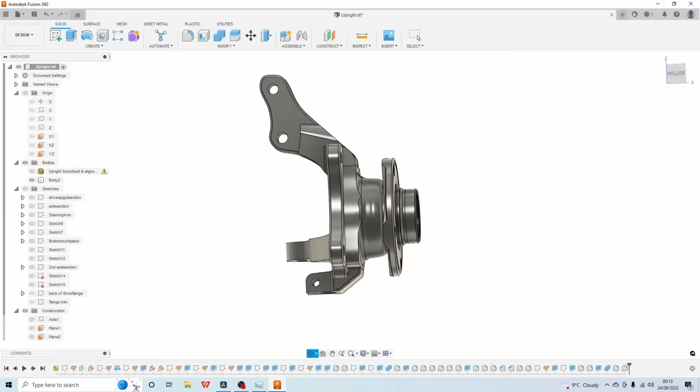If you want to use a 3D scan of a part like this to make a fully modifiable and usable 3D CAD model using only free software, you're in the right place.

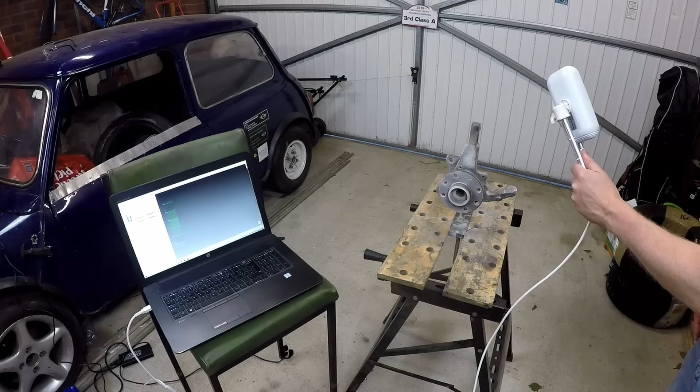So the first job, of course, is to scan the part. So I'm using my CR Scan Lizard to scan this, a Vauxhall Corsa C upright. Now the reason I'm scanning this will become obvious in later videos, but for now all we need to know is that I need a 3D model of this that I can easily modify. But it's also a useful part because it's got some very clear geometry, it's got planes, it's also got cast faces. That means that I've got a nice variation of geometry to deal with.

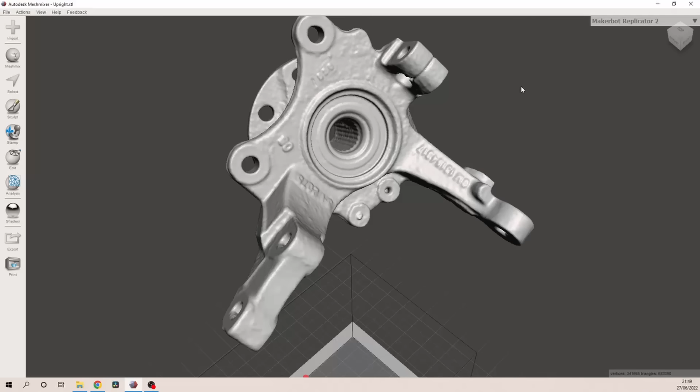Now, it doesn't matter which scanner you're using because actually we're just going to pick up from the STL. So for this, I'll simply say I used dry shampoo and scanned it from multiple angles, combined them to give me this, the final STL. Which leaves us with this 3D model.

Before we go any further, we just need to work out what we're trying to achieve here. If we just wanted something we could 3D print or something that was just purely a copy of what we've got as far as our scanner can do, well, there it is. We've got it, done. Send it to the printer, it's an STL, you can do it straight away. However, that's not what we want to do. So we want to reverse engineer it.

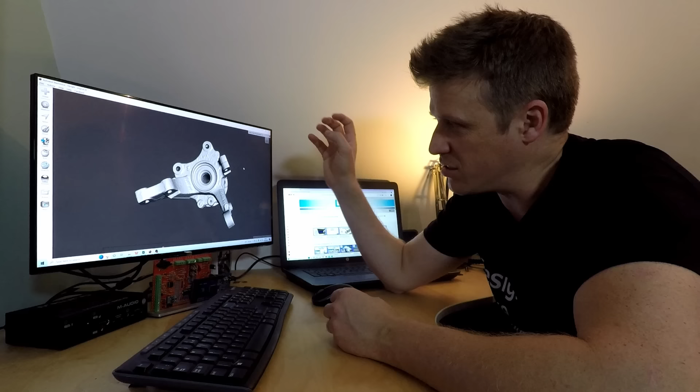So we want to pull out all of the features that interact with other items that give it its form, its function and its fit. So I want to extract all of these points where it interacts, so the steering arm, the strut, the brake caliper, the drive shaft, and extract all that information and put it into another 3D model that I can then modify and change using parameters. So that's what we're going to do.

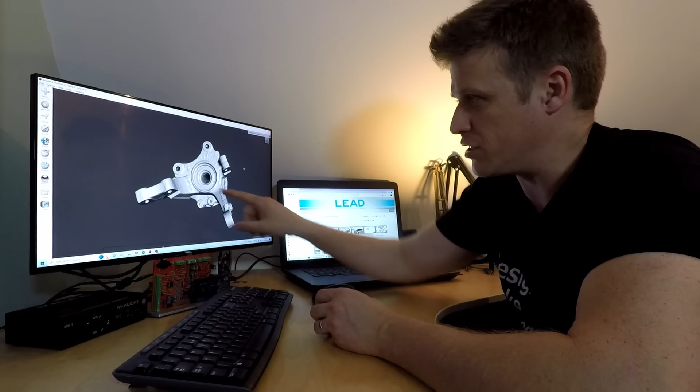But first off, we're going to remove a few things from this model and simplify it slightly. So we've got all this writing here, all these casting marks, we've got these items here that look like they're a sprue from where it's been cast, which we don't need. So we're going to tidy this up, we're going to do it all in Meshmixer. So, hit the music.

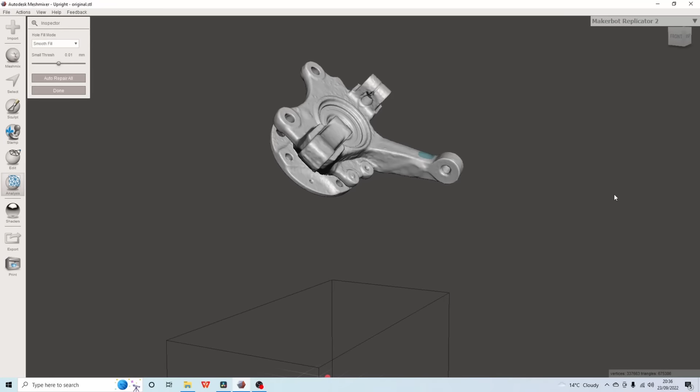And there you have it, a simplified, smoothed out model that really is just giving us the information that we really want to see. But as you can tell, it's not aligned with the coordinate system at the moment, which is a problem. So for that, we're going to open up another piece of software. So this is GOM Inspect, and this is a fairly chunky piece of software that generally only the pros get to play with, but they do have a free version. So you can open a new project, import your STL.

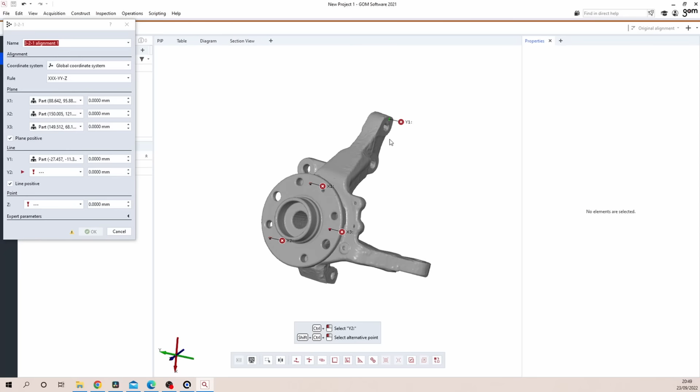Now we've got the model in the software, we can easily align it to our coordinate system by using a 3-2-1 alignment, where we pick, first off, 3 points that are on a plane perpendicular to the x-axis, and then 2 points that are on a plane perpendicular to the y-axis, and then 1 point on a plane perpendicular to the z-axis. And there we have it, we've got all of our points in, and you can see it's now aligned to our coordinate system.

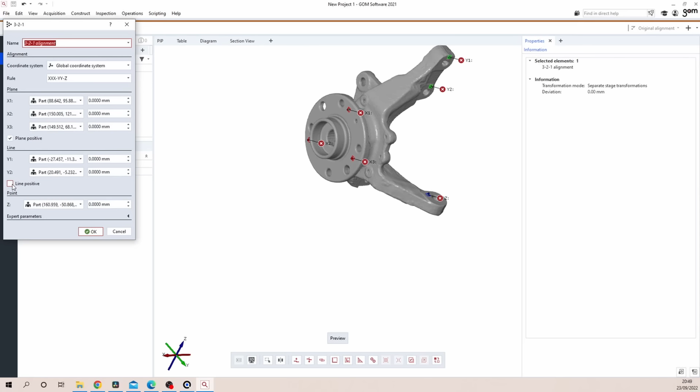But you can see Z's going the wrong way, Z's going down instead of up. So if we flip that, that will flip Z for us going up that way. So we simply go OK, and there you have it. It's now aligned to our coordinate system.

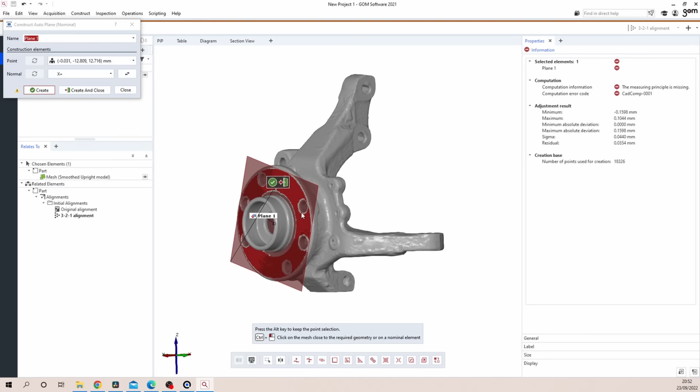Pretty nifty. What we can easily do in GOM Inspect also is we can use the construct function to put planes and get them fitted to our mesh. So if we click there, that has now constructed a plane fitted to all of those points that you can see highlighted in red, all of those facets.

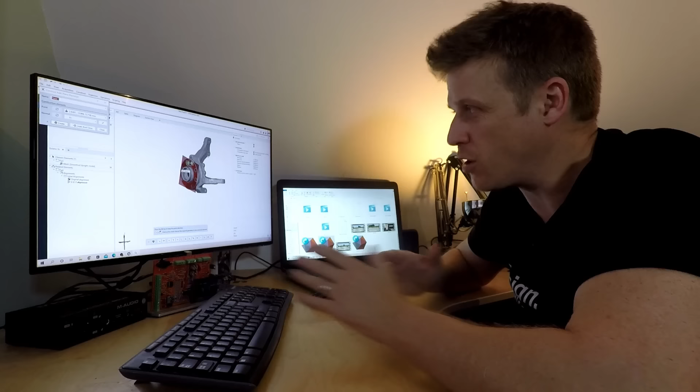And that's great. However, the more we do that, the more they're going to be fitted to the model, and they're not going to align perfectly with the planes that form the basis of our coordinate system, the origin. So that's going to make life very tricky. So we're not going to do that, although it could be a very useful thing in the future. Who knows, you might see that in other videos. But for now, we're just going to save this model and export it as an aligned mesh.

So I'm going to put that model into Fusion360. Now I'm using Fusion360 because I like Autodesk products. I know Fusion360 better than anything else. And plus, it's free. So you can use a really powerful program without having to spend any money.

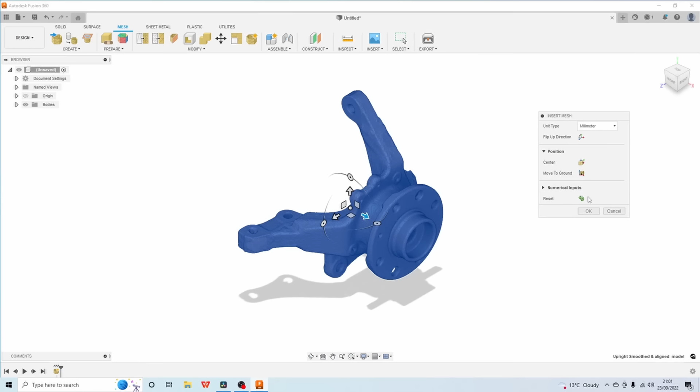We can potentially flip the up direction like that, but we don't want to do that. For me, I like Z to be height, so that works perfectly well. So if we look at it from these various angles and we turn the origin on, that works well enough for me.

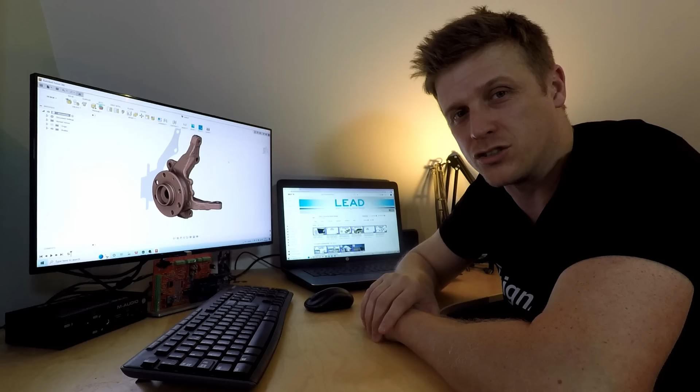Now what's the goal? We're going to build a fully prismatic model out of solids. So not surface, but solid. So something which we could define using parameters. If we wish to, we can change, we can measure, and we're going to do that here. And the first thing to start on is to give ourselves a datum right down the middle of the drive flange. So the axis of the axle, if you will.

To do that, we're going to do the core trick. This is the killer app. This is the one trick you need to know that will help you out, and basically it's this: create mesh section sketch. So we click on that first and we click that body, and you can see it's already selected this plane, and we can pull this plane through.

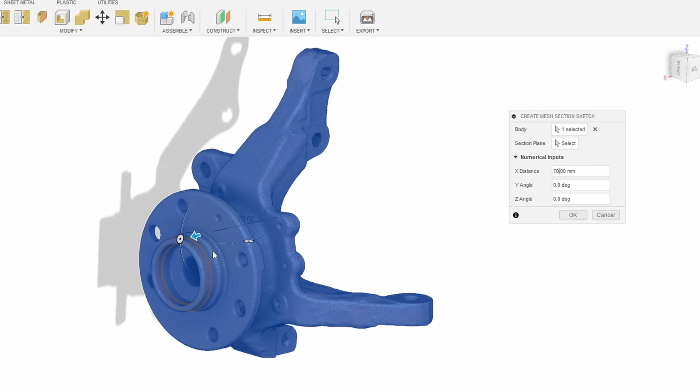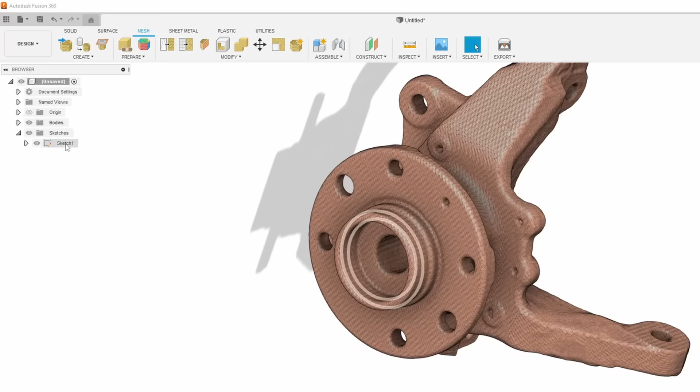If we want to fine tune it, we can do that with this box here. And I'm going to take a section, create a sketch on that section there. These orange lines around the spigot on the drive flange. Click OK. Now that has created a sketch up here called Sketch 1. I'm just going to rename that and call it the drive spigot section.

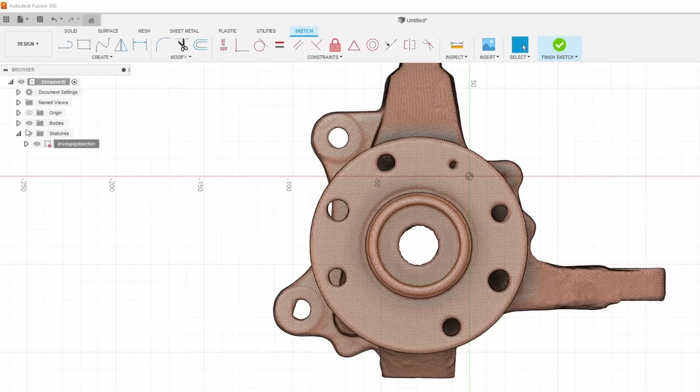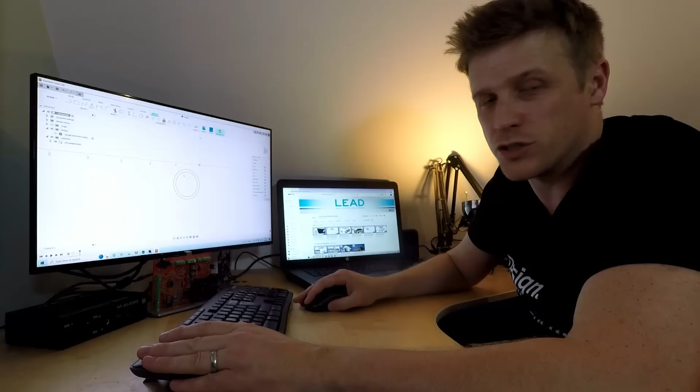And the next thing we do is we right click on that and we go edit sketch. And you'll find it's easier sometimes just to turn off the meshes so you can see this sketch. Now you can see we're now in sketch mode, but we can't really select those orange items. But what we can do is the second part of the trick, which is this fit curves to mesh section.

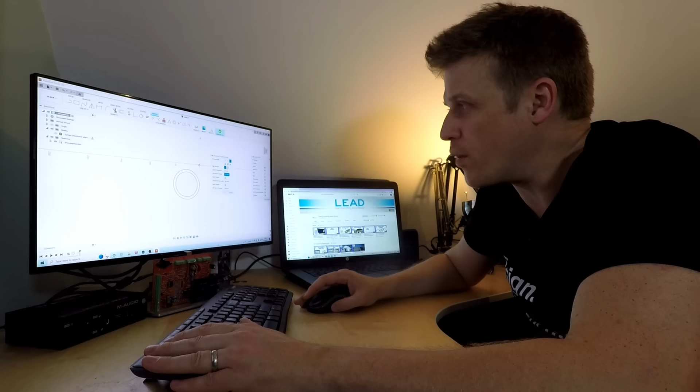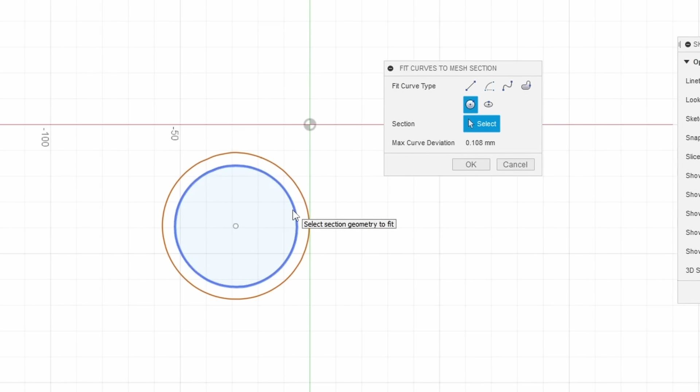So we click that and it gives us this little dialog box here where we can draw lines, we can draw curves, arcs, but we're not drawing them. We are fitting them to this. So we really want to fit a circle to these two circles. So if we go to circle, and we can click on that one, you can see there's a maximum curve deviation there of 0.108 of a millimeter.

So it's not far off. So if we click OK there, and finish sketch, that gives us a surface, an enclosed circle, an enclosed sketch. So we could do anything with that. We could extrude that, we could do whatever.

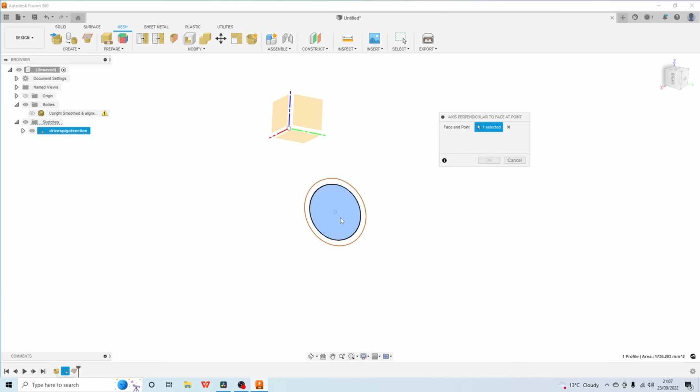But we're going to go here to axis perpendicular to face at a point, and that's the face, and that's the point, and there's our axis. So if we turn the mesh back on, you can see we've now got an axis running right down the middle of it. Looks pretty good to me.

Now, you may have guessed you can use some of these tools to do alignments in Fusion. And you can do the full alignment to the coordinate system in Fusion if you wish. And in fact, there's a whole load of videos already on this stuff.

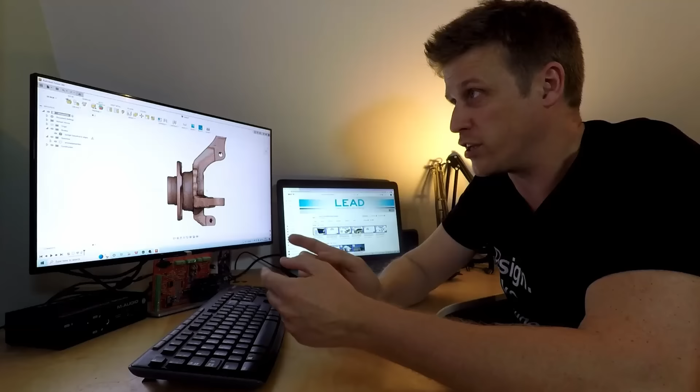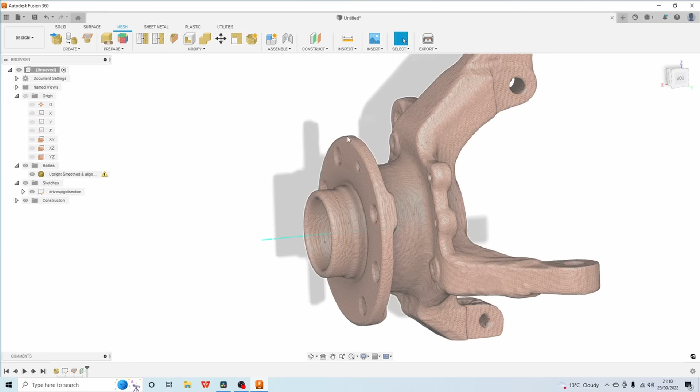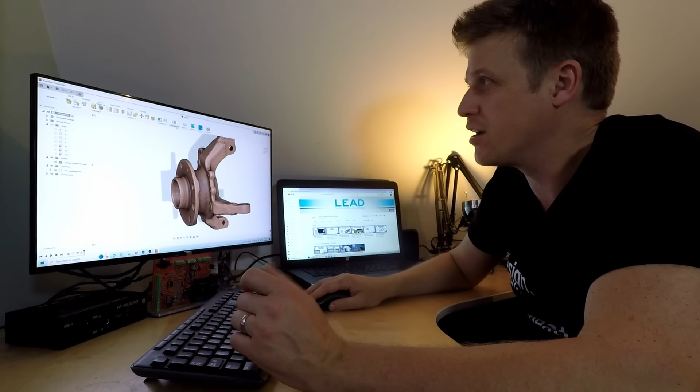But let's carry on with this. Anyway, so let's start building this model. The first thing I'm going to do is revolve this drive flange. So what we need is to take a section sketch of this drive flange, and we could drag another plane in, but I'm going to construct a plane that's right down the middle, and that's easy to do because we've got an axis. So we can say plane at an angle on that axis, 90 degrees, and you can see it's there right down the middle of the drive flange.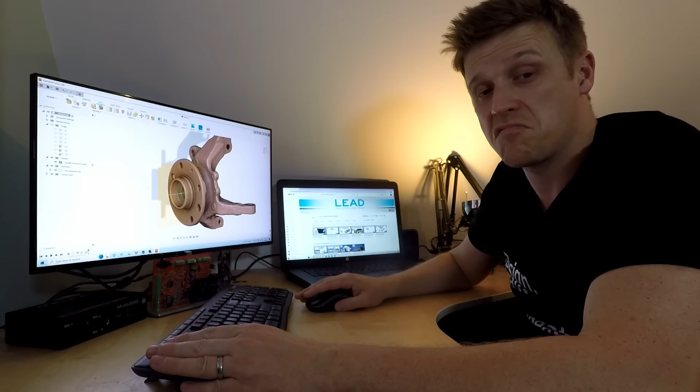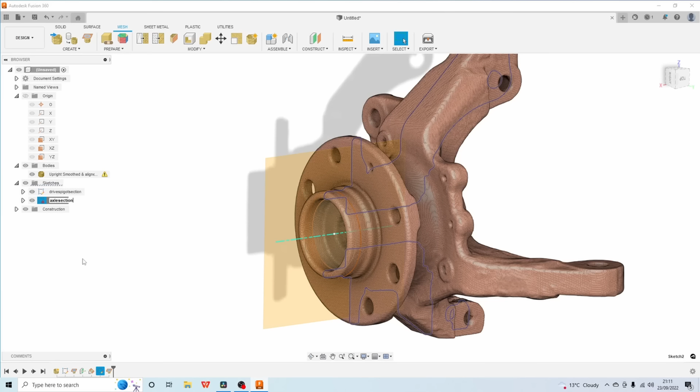So that's pretty handy. So we can go to here, create mesh section sketch using that body and that plane, and we click OK, and we've got magically another sketch. So I'm going to call that axle section, and if we turn this off, we can see we have essentially cut that in half.

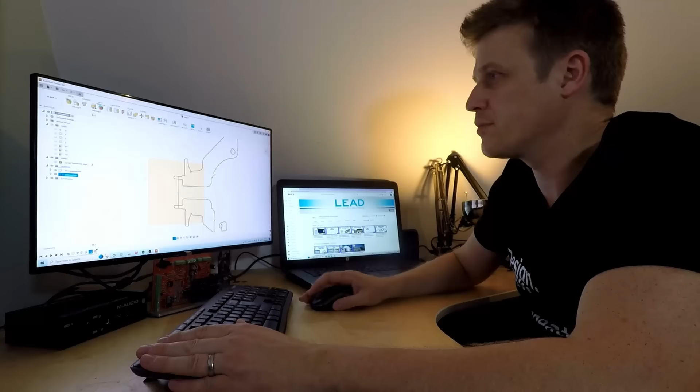So what I'm going to do now is exactly what we did before. We right click, edit sketch, and we're going to go fit curves to mesh section, and see we're still on circle, so it's just given us a circle, but what we can use is spline, or closed spline, and that will essentially go around, fit that one, and we're going to just draw them all in because why not.

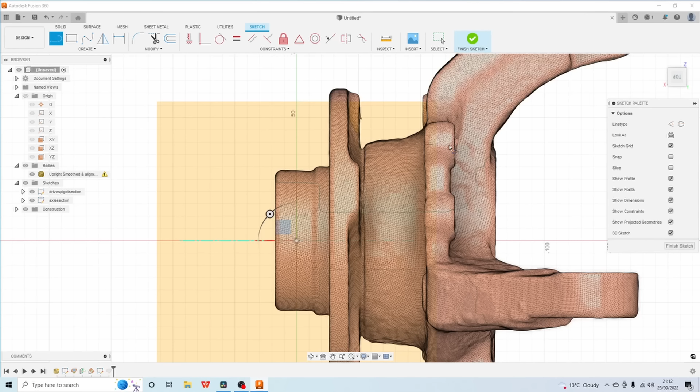So now you can see we've got all of those areas as, again, closed sections that we could extrude, we could do something with, but we're also going to do a little bit of drawing here. If we look at the mesh itself, actually there's a fair amount here that could all be extruded and revolved. So obviously we can't revolve these bits here, so we'll cut them off.

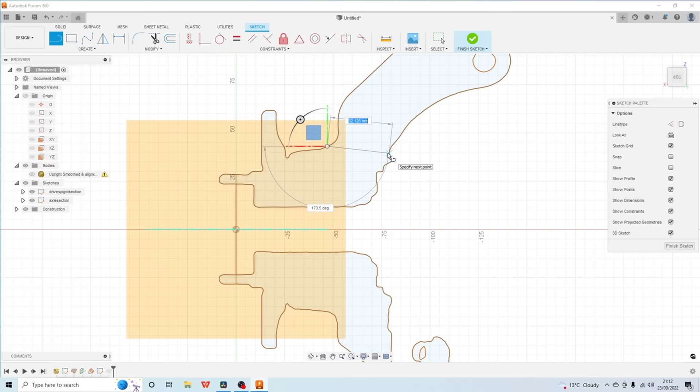Now we've got a closed area that we could extrude or revolve. Let's do it. Let's do a revolve extrusion. We've got the profile selected. We have the axis there. That looks pretty good. So there you have it. That's the first kind of section done.

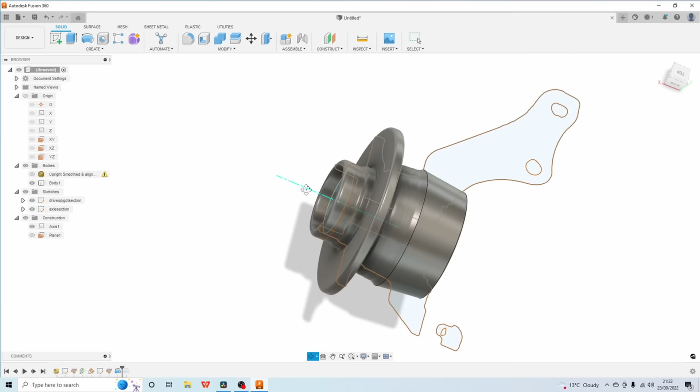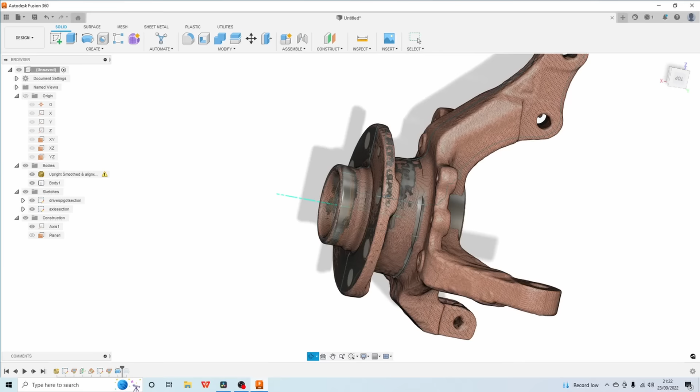If we bring the mesh back in, you can see in many areas, it's about bang on. It's kind of sharing the space pretty well. However, we can see here that it's following the contours of the mesh. And as you can see, that's not quite a perfect barrel, a perfect cylinder.

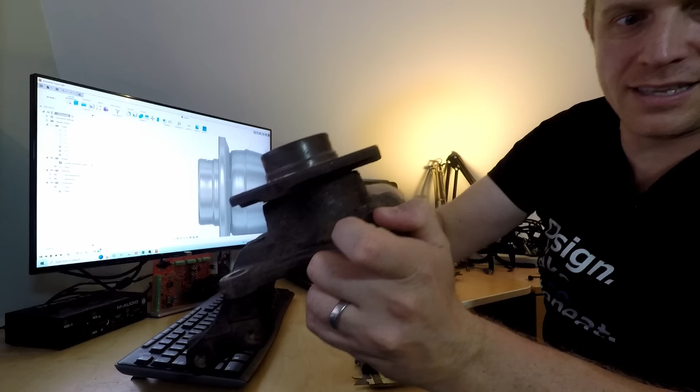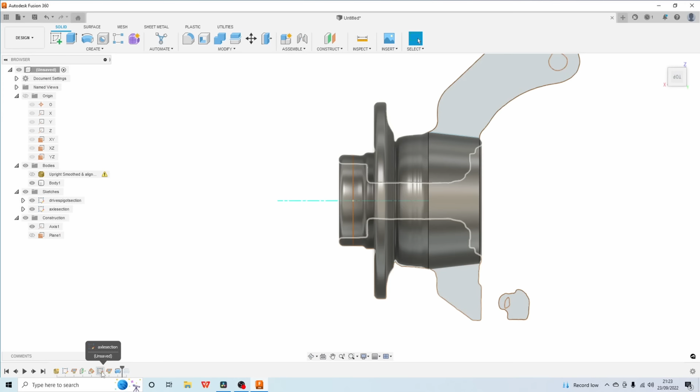And it is, because I've got it here. And you can see there's no taper on that. That is a nice parallel-sided cylinder. So because of the way we're modeling this, we still have our design history here, so we can actually go back and change this drawing that it's defined on.

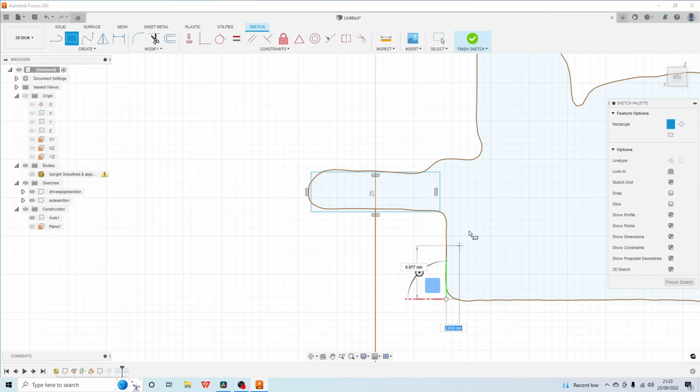So we can go back, edit sketch, and instead of just blindly following this, we can actually put some rectangles into it. And yeah, look at that, looks about right. We could fill this whole area with rectangles, and we could start knocking it out and making it into shapes that we actually like the look of, to give ourselves something to revolve. But we're going to do one better than that, and we're going to use measurements.

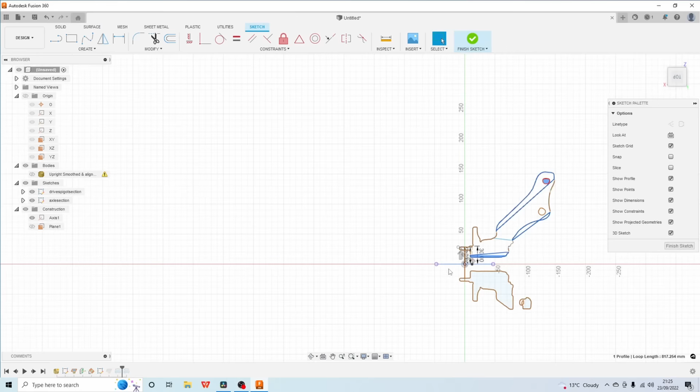So we've got our Mitutoyo, and we know that that drive spigot to locate the wheel is 56.49 millimeters in diameter. So what I'm not going to do here is go through every single step, because this is essentially just 2D drafting in Fusion. You can use constraints in the same way. You can interact with the mesh section sketches in exactly the same way as you would do any other drawing. So it really is dead simple.

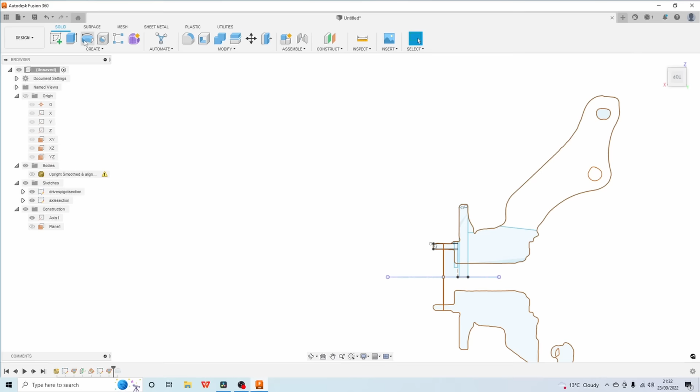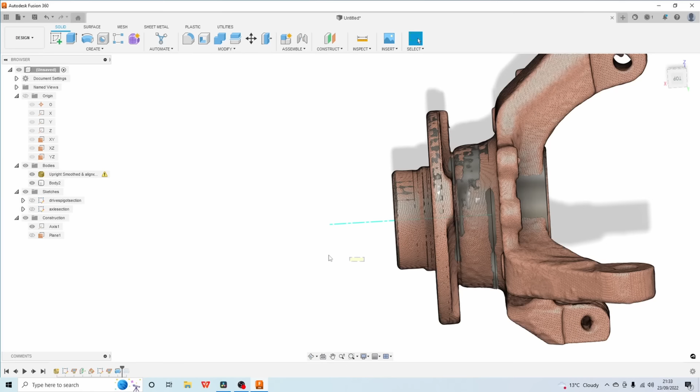So if you want to create a sketch based completely on constraints that you can come back and easily modify later, now's your chance. So now you can see that we are looking far more like an engineered piece, like it's got actual cylinders that you can define. If we don't like that diameter, we can go back and change a number, and all those changes will roll through. How's it looking? Yeah, we still got it fairly close to the model itself.

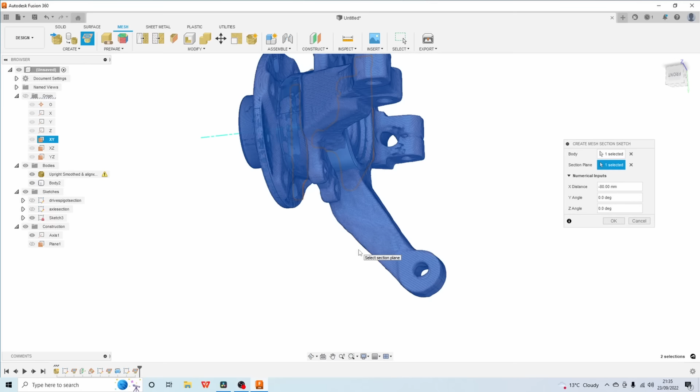So now we're going to try and model this steering arm. So we can do the same thing again. We're going to create a mesh section sketch, click the body, select that plane, which is the one we're looking down on really at the moment, and then we're going to select the right position for it. Just move it down here, and you can see there that one's cutting it pretty much through the middle, so that's the one we want.

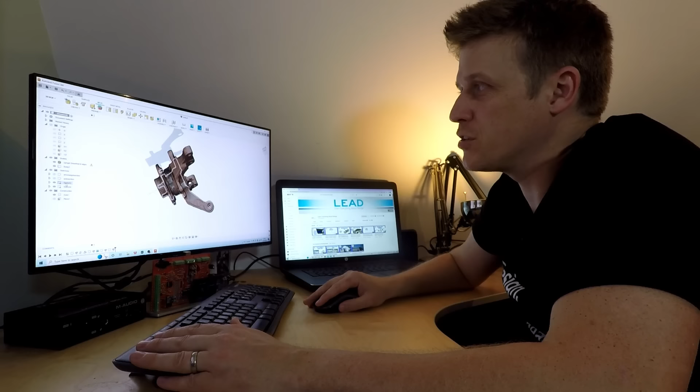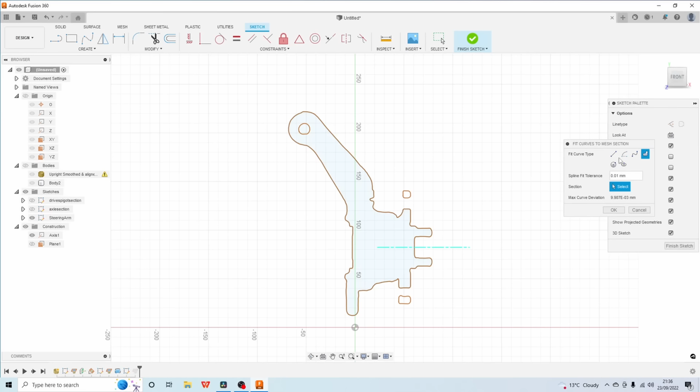So I'm going to click OK to that, and that's giving us another mesh section sketch, so we'll rename that one steering arm, and we'll do as we did, go in, edit sketch, turn off the mesh and the body so we can see it. So again, create, fit curves to mesh section, close spline, we'll just create a closed spline based on that, and we will create a circle based on that. And there we have, again, a closed section we can do something with.

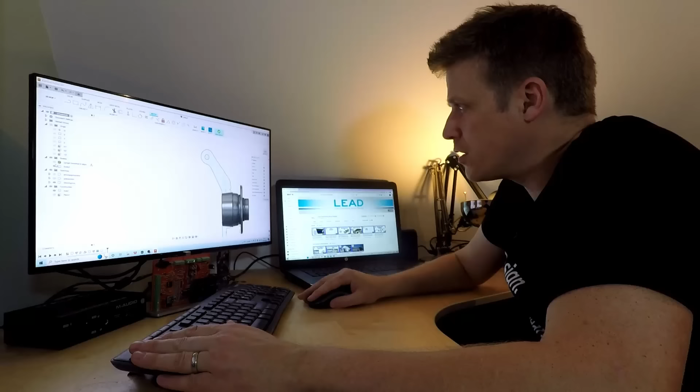So what I'm going to try and do is I want to create this body and I want to join it to this body. So I'm going to cut it off a fair amount inside this body, but I don't want it to interfere with any of the revolved sections. So here it may well do. So we'll cut that off, and then we've got a separate section here which we can extrude. So let's do an extrude. So go back to our solid tab and we go to extrude and we go 2 sides.

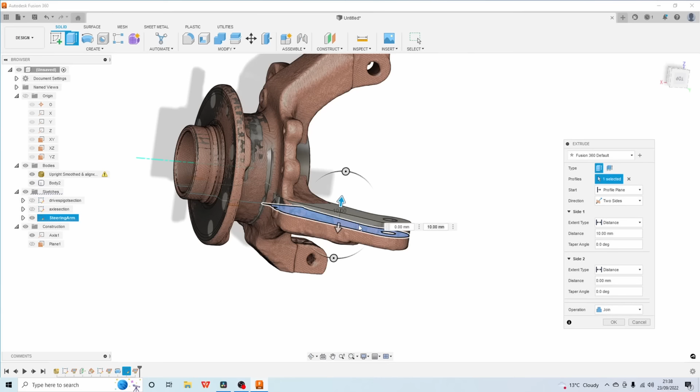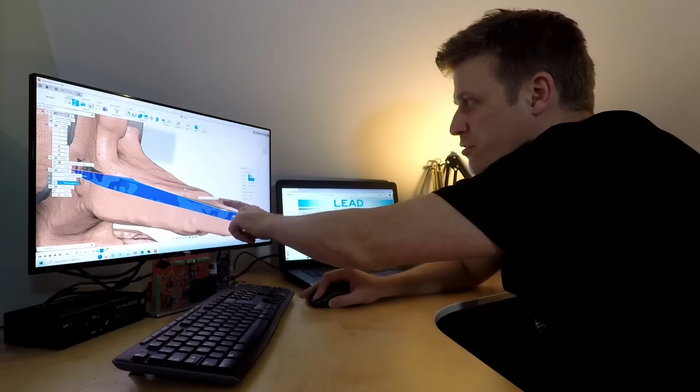But let's put the mesh back on. Let's see if we can get that. Let's have it as a join. Now you can see the top surface on that somewhat tapers. And this surface here is actually machined. So this is the raw casting coming through, or the forging, then you've got the machined point there.

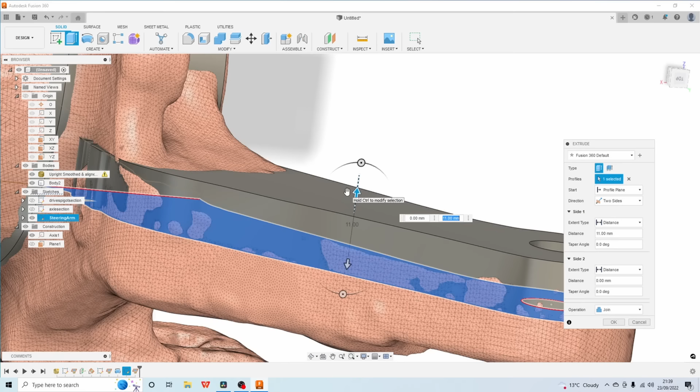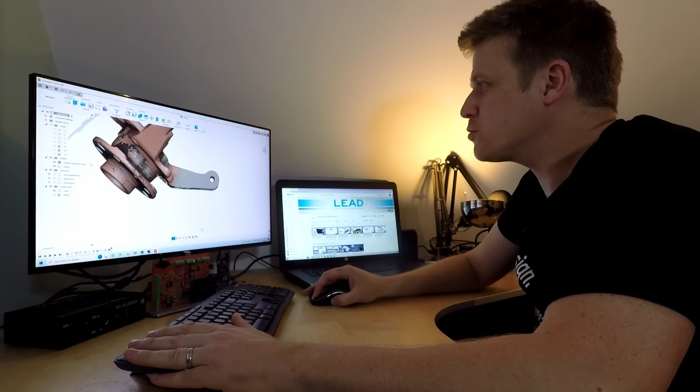So I'm going to extrude on this side enough to give me that much space, because we're going to come in and do this in a slightly different way, and we're going to do that on the other side as well. We're going to have it so you can just see it. So it gives us pretty much all of the arm. You can see that looks pretty good. It's quite close, but you've got all this material on the top and the bottom that we couldn't do anything with.

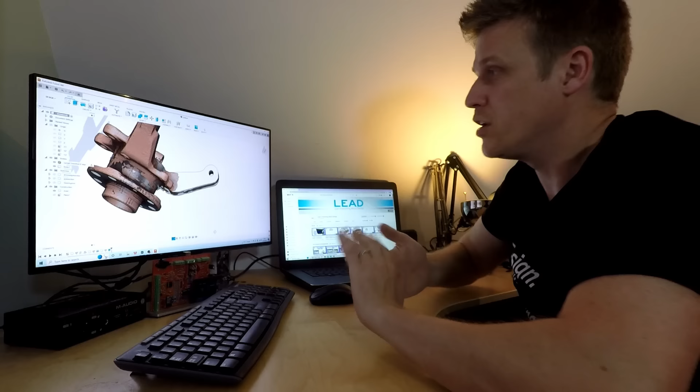So what I want to do is I want to have a plane that runs pretty much down the middle of there that I can then do another sketch on and then remove. So we need a plane down the middle of there. Now the best way of doing that is simply to go back into this sketch and to give myself a construction line that runs broadly down the middle.

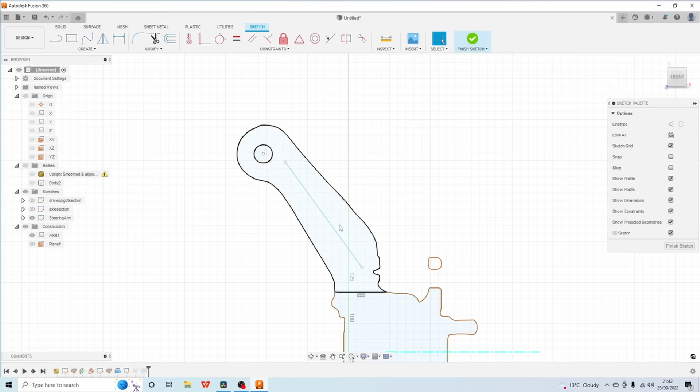Highlight it, turn it into a construction line. Turn the bodies on just so I can organize it. And then we can do construction plane at an angle. The line is already selected, so I just do 90. And you can see we've got that there.

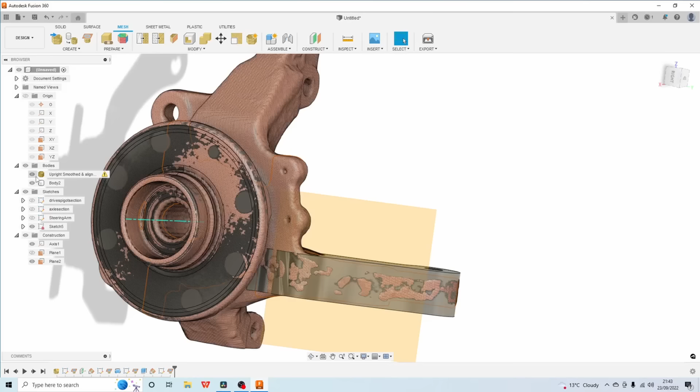So now we can do our same trick again. We can go back to the mesh tab, create mesh section sketch, click the mesh, click the section plane, and there we have it. So now we've got our mesh section sketch. We can simply go in, edit sketch, and do pretty much the same thing we did before.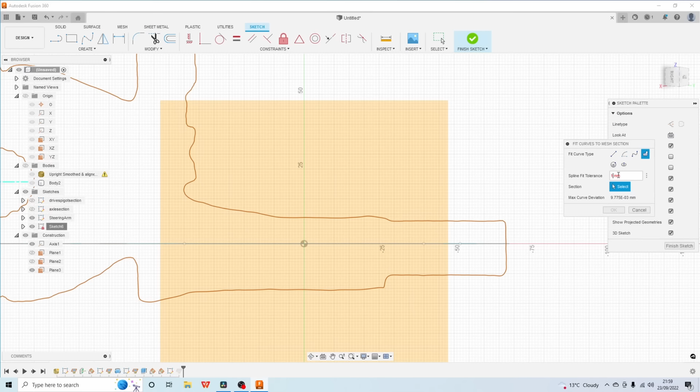And first off, we'll use fit curves to mesh section. Now I don't really want this to be absolutely bang on. It doesn't really matter. So in order to get a better, smoother spline, I'm going to up the tolerance here. And that should mean I get something a little bit more usable. So because I'm going to use this shape to cut out, I'm going to give myself a little box there. So now we've got the outline.

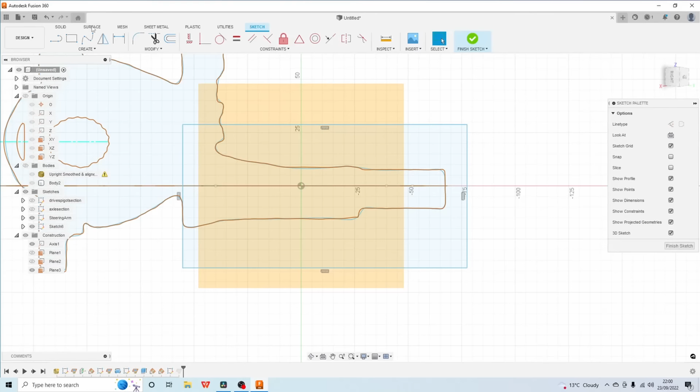Now I'm going to tweak that because I'm not quite happy with the way it swoops in and out, because it doesn't have to be absolutely bang on, but I want it to look good and look like there's a nice smooth kind of taper there. So now I'm using the spline tool. I'm also using constraints and measurements off the part itself to get what I think is going to be the most representative profile for this steering arm.

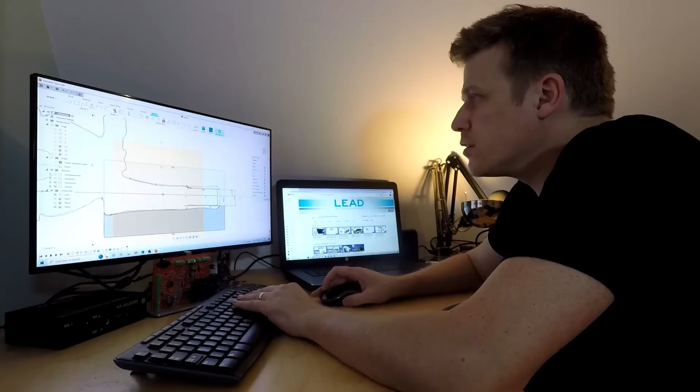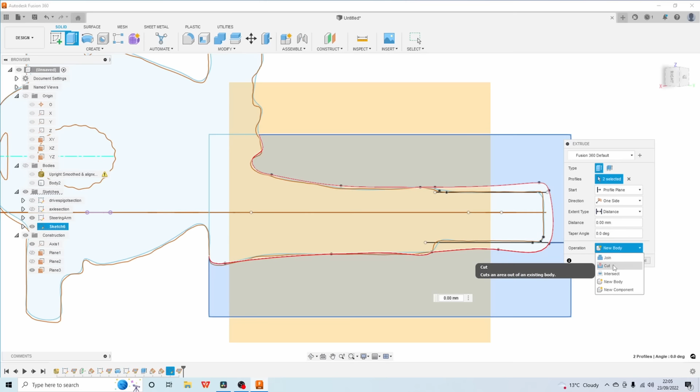So now I've got everything defined, we can finish sketch, and we can pick the bits we want to use as a kind of a delete tool. So we go to extrude and we use cut, and we can pick all of these bits that we want to use as the tool to cut this down with.

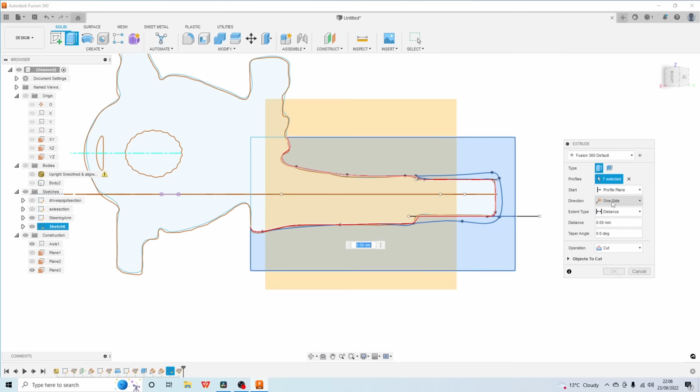Again, we go to two sides. We can turn the body on. It doesn't really matter too much, the extents, because we're not intersecting any of the bodies. And there you have it. Turn off the construction, turn off the sketches, and we're getting pretty close to what we should have.

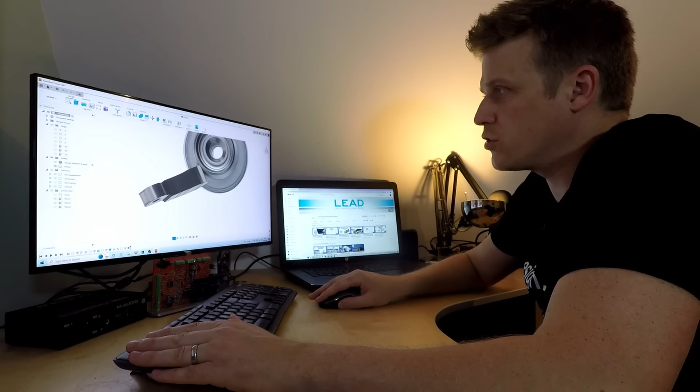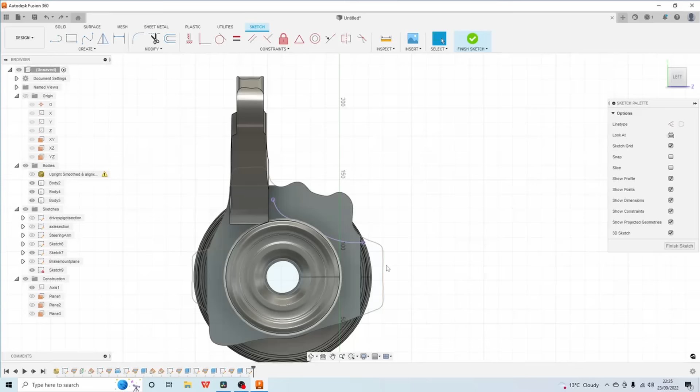And that's the core of the techniques. So let's just do that a few more times for pretty much everything else. So it's a dead easy set of instructions. First off, you create a mesh section sketch, then you right click on that new sketch and edit it. Then you fit curves to mesh section, and then you've got some lines that you can interact with the same way as any other sketch.

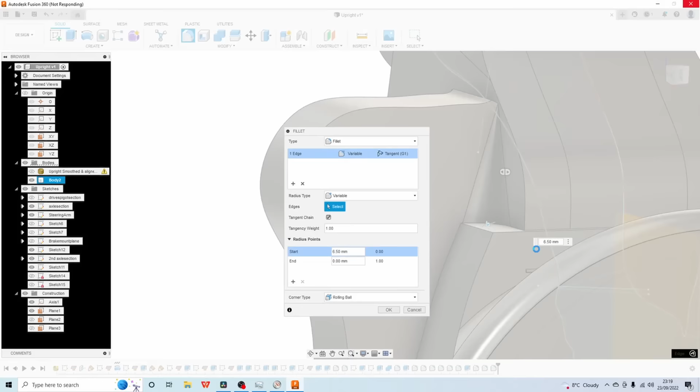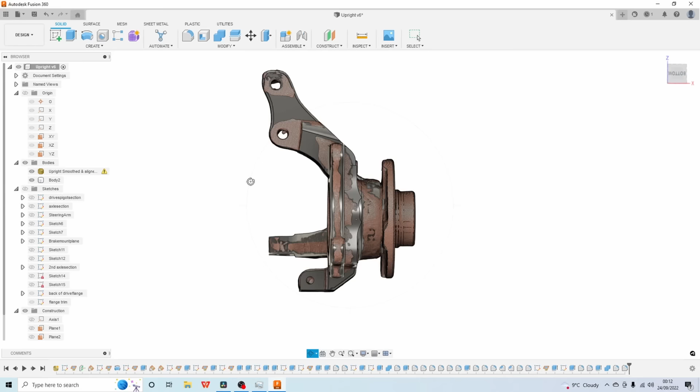And those sketches then you can use in the same way as you would do any other sketches on Fusion, and you can extrude, you can revolve, you can loft, you can do pretty much anything. And then once you've got those solid bodies, you can then modify those in the same way you would do with any other bodies. You can chamfer, put fillet radiuses on and use them as cutting tools, whatever you want to do. So it really is quite simple and very powerful, but it does take a long time.

So after about 2 or 3 hours of modeling, you can see we've got a model there that's fully parametric, fully editable. You can go back and change it in any way you want, and turning the mesh on, it's not that far off. Now we could go back and tweak it and change it and make it absolutely perfect, but that is good enough for me.

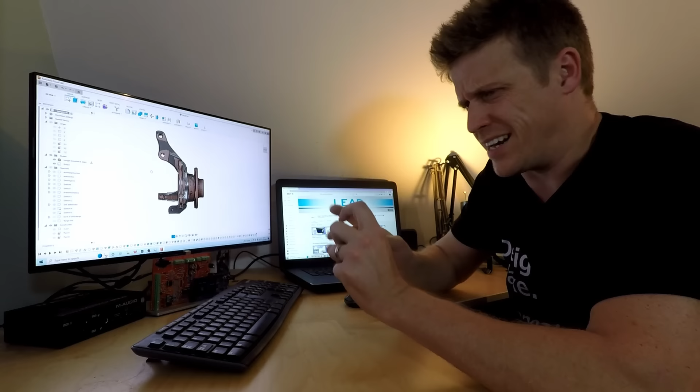This is just a really kind of compressed summary of these tools.